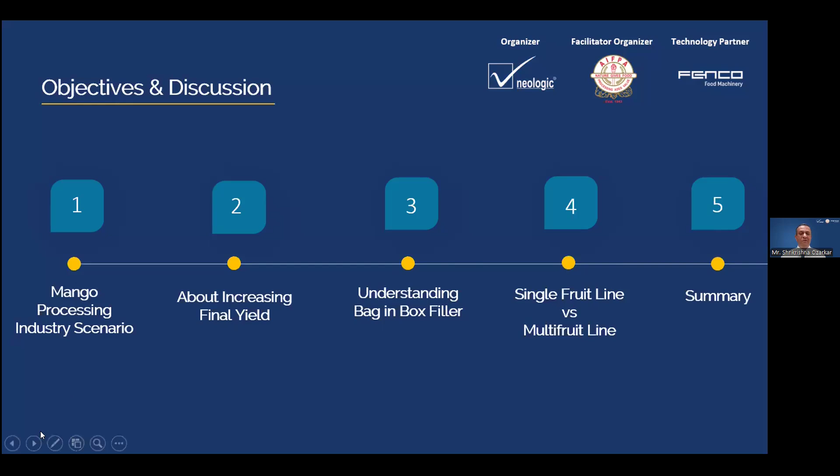So over to you, Dr. Jadli, sir, to take this slide.

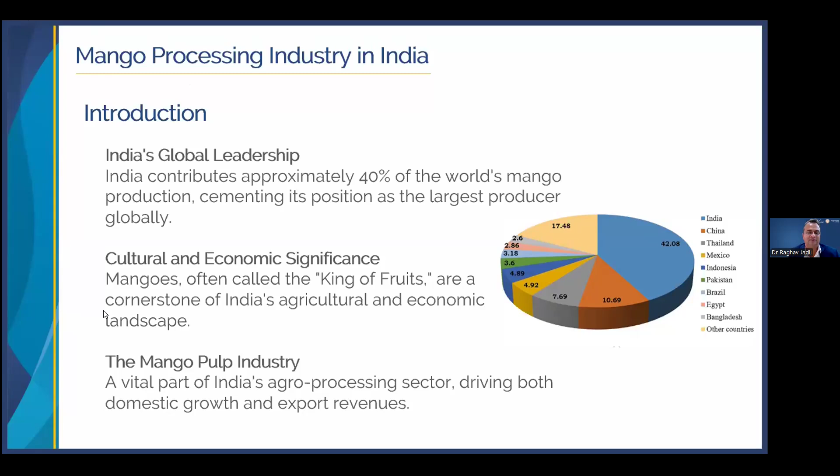Going with this for the mango pulp industry, a large part of the processable variety includes Totapuri, Alphonso, Kesar, and now Neelam, and in some part of Uttar Pradesh in North India, Dashari and Chausa as well.

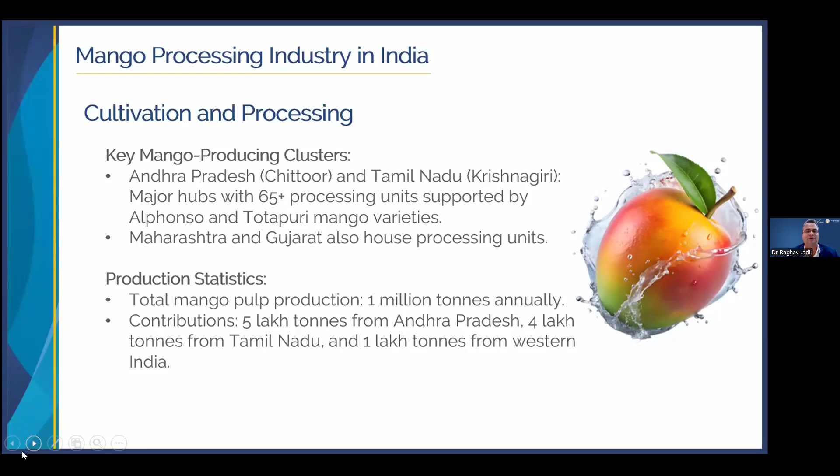When we talk about mango pulp processing, the key cluster area is Andhra Pradesh. When I say Chittoor, I mean it includes other regions like Madanapalle, Vijayawada as well. Then in Tamil Nadu, Krishnagiri, Dharmapuri, and Dindigul and this area. Around 65 plus processing units produce a sizable quantity of mango.

In the domestic market, 40 to 50%, and now over a period of time that percentage has slightly gone up, even to maybe 60%, which is consumed in the domestic market mainly for the juice and beverage sectors. Out of 10 lakh ton produced in mango, nearly 1 lakh goes to the HoReCa and food services market.

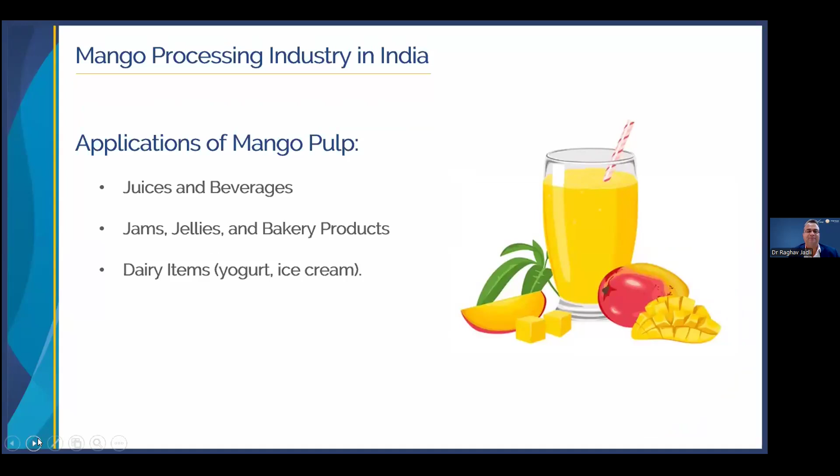Final products, when we talk about it, juice and beverage remain the first one. Then dairy, flavored milk. Then jam, jelly, bakery products, and dairy items like yogurt and ice creams.

There are quite big challenges, friends. The mango industry has been going through a challenging time, particularly on the technical aspect, with wastage and the traditional canning packaging issues like rusting on the seam of the can, and feathering. I think around 12-13 years back, there was a radical shift of the mango pulp industry from canning to aseptic because of these challenges of rusting, feathering, paneling, and buyers always facing issues at custom clearance, even though the inside product was much better, but still the authorities had concerns.

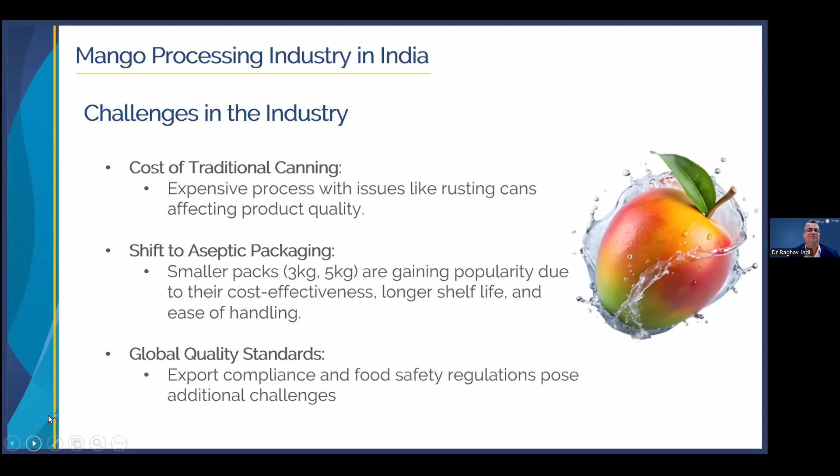So there was a radical shift to aseptic packing. Firstly, we have to meet the global compliances and the new packaging support. What we are really looking for is eco-friendly packaging, and this is happening. This is the trend of the international market, even in India, which has eco-friendly packaging to promote sustainable cultivation practices to ensure long-term growth and product stability. Technology advancement has a big role, and they invest in research for improved processing techniques to maintain quality and reduce cost.

Aseptic is one of these things, and I will take it a little further forward, Mr. Ozarkar - what will be more sustainable in coming times is biodegradable aseptic packaging for better shelf life and export readiness.

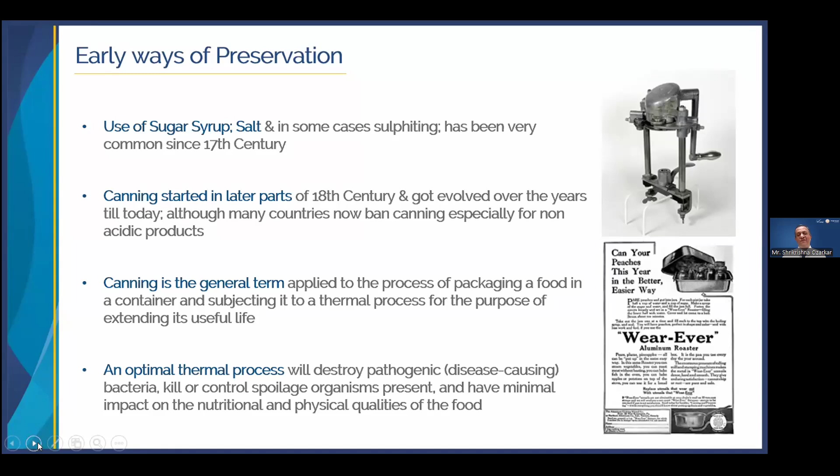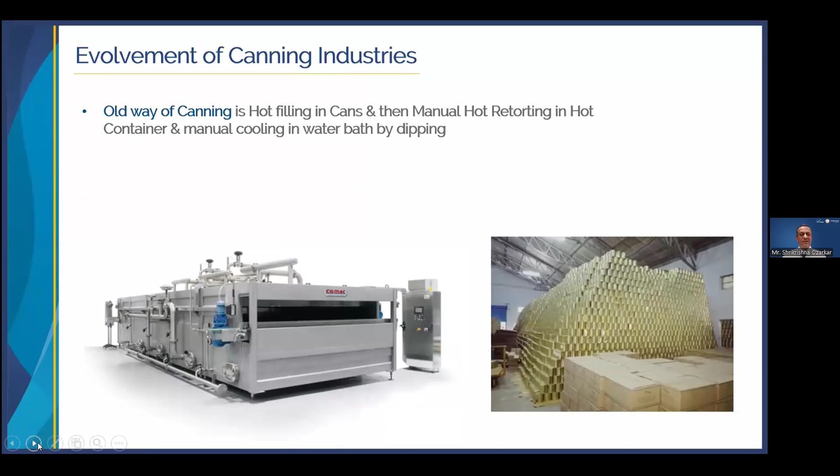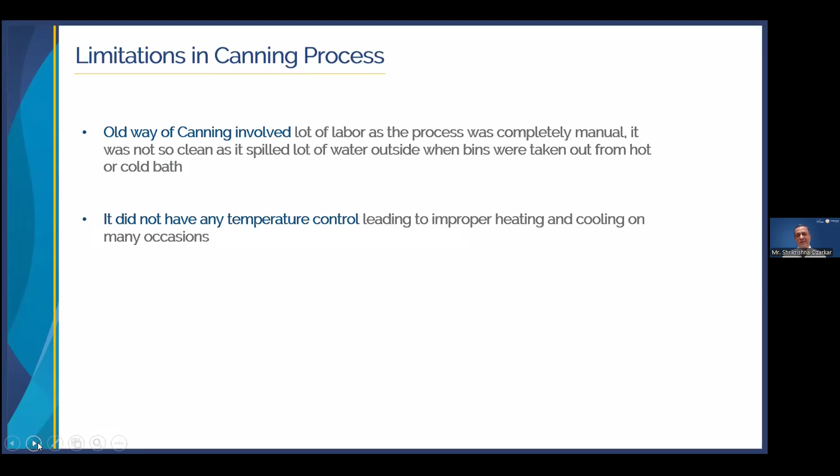I will quickly cover the earlier ways of mango processing. Dr. Jadli has already covered in one of his slides about canning and other industry. This started way back in the 17th century. We won't go into details since most people are aware of what was happening in the canning industry or how mango pulp was processed in earlier times - this is just for reference, refreshing our memories. These pictures we have seen in many places - the canning industry, storage of cans, can cooling tunnels, sterilization tunnels. This has been replaced by aseptic lines due to limitations. Like Dr. Jadli mentioned, the rusting issues - there are places where lead or tin contents are not acceptable. All this has led, along with flexibility, transport, and shelf life benefits, to aseptic lines over the years.

So now we'll be discussing how to add profitability to your processing line, how to increase your yield, and all the technological advancements. For this section, I request Mr. Massimo Manfredi from Fenco Food Machinery, Italy, to take over. Over to you, Massimo.

Thank you, Mr. Ozarkar. Good evening, everyone. Let's try to explain what next could be done, or what best could be done out of your very nice and juicy product to get better yield and better quality. Looking at what was happening in the usual line, we were thinking of finding a new solution to reduce the waste by adding fiber to the same final product instead of rejecting it, as usually happens in the normal pulp refiner.

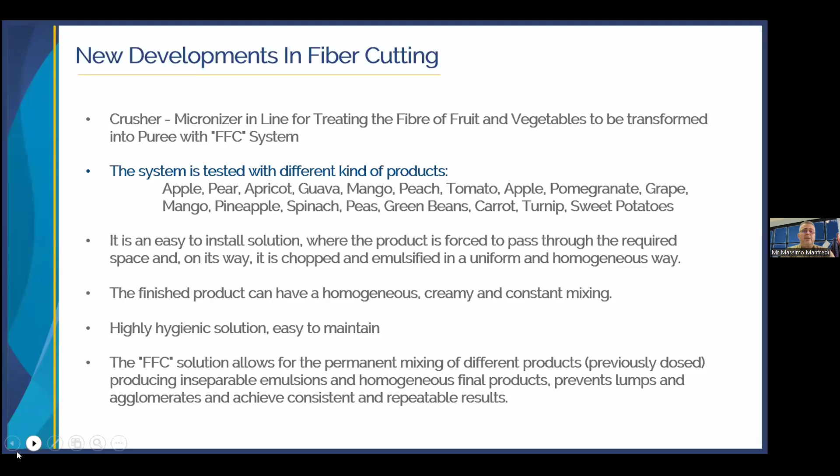So that's why we came with this FFC, Fenco Fiber Cutter. This system has been tested definitely with mango, but all the products you might be reading here, apple, pears, all the continental and tropical fruits, including numbers of vegetables too. Shortly, we could say, as hard as the product will be, the better performance you can have out of the fiber cutter.

Installation is very easy to be done, could be installed in any of the existing plants all over. What we were able to achieve, just to give you a couple of numbers: apple-based product, we were having product with Bostwick between 10 and 12, and we were going down to 4 to 5, always with natural product, no concentration, nothing.

What we were obtaining is a more creamy product, almost without black speck or brown speck. This is facilitating a lot also the decision to have or not the decanter in line, which is always better to have, definitely, but this will facilitate the result. And very important also is that we are not going to have the syneresis.

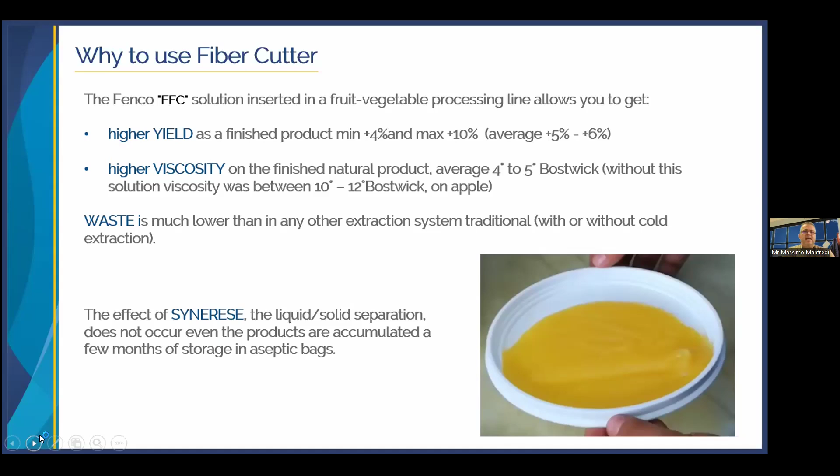Syneresis is the effect of the liquid and solid separation while you have your product packed in an aseptic bag after a couple of months, let's say, a couple of weeks. So all this is generating a very creamy and very effective final product.

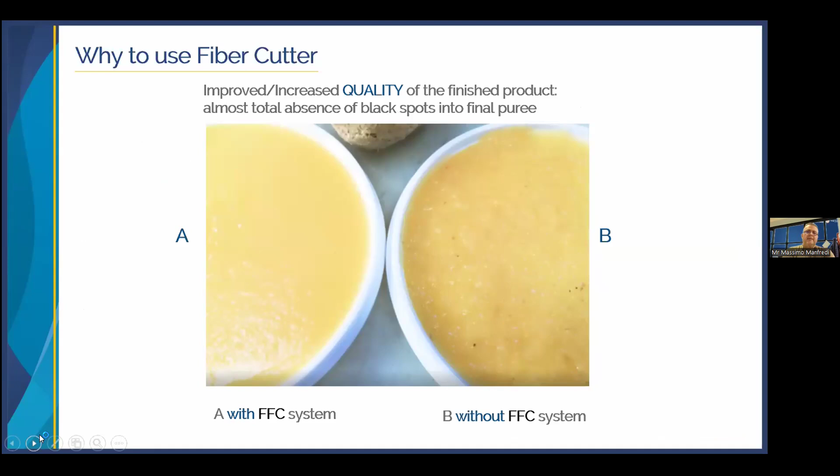And here you could see, on the left side, product treated with fiber cutter; on the right side, product not treated with the fiber cutter. So you could see the differences.

As I was saying, the quantity of waste which you are going to have -- this is where we are measuring our ability -- is always on the waste side. So you could see my hand pulling a ball of fiber rejected after the turbo refiner. It is practically only mostly cellulose, or not edible part, let us say.

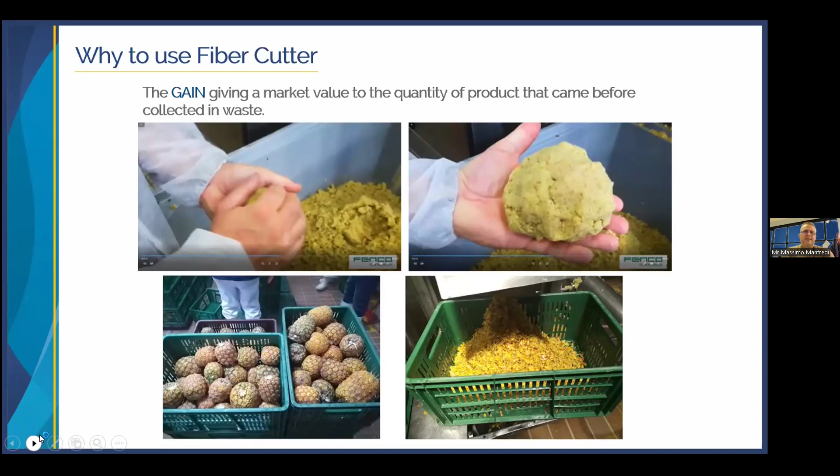Similar result has been achieved with pineapple and most of the fruits. This is improving the quality, reducing the waste, or increasing the yield. Better, with practically almost no black specks and without syneresis. These are the main goals.

The tool could have different configurations, allowing also to crush -- like what we are going to see here is a pepper chopped, respecting the seeds. So there is a possibility to play with the same system by changing the tools inside.

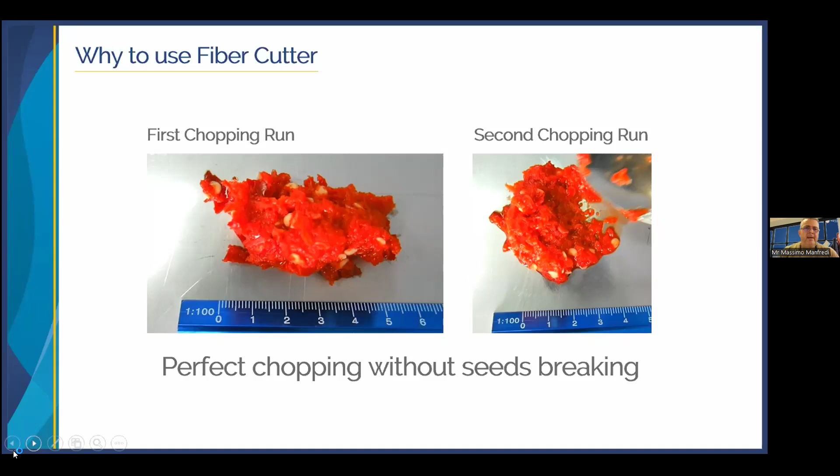So what has been previously done and treated so nicely during the process, now we have to fill it, and to fill it into the aseptic, as my colleague was explaining a few minutes earlier.

And the new tendency is to have the web type filler. So what does that mean? It means that in aseptic condition, in fully automatic mode, we can fill the puree, natural or concentrate or whatever is your final product, into smaller size -- an ideal solution and ideal size for the HoReCa circuit, meaning hotel, restaurant, and catering, and not just the industrial size as you are used to nowadays.

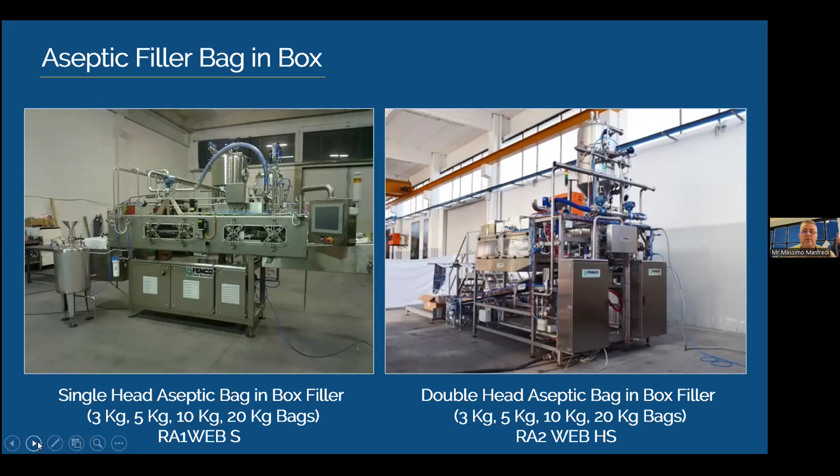So for this, we have different types of solutions. On the left side, you could see the simple aseptic filler, single head, which in any case is able to achieve up to 500, more than 500 bags per hour on various sizes, definitely, and later we could see some diagrams. On the right side, we have the double head high-speed filler, which could go up to 600 bags per hour each head. So single head, left side; double head, right side.

Ideally, the system needs an aseptic tank to control the flow and to guarantee that there's no recycle, because what we have to protect and prevent is the thermal stress -- to avoid having the product overstressed by double thermal treatment due to the recycle.

Any of the aseptic fillers could handle pressure type aseptic spout, or open and reclosable, or V-top. V-top is definitely for the juice, for the very liquid one. So the system and solution are available from 3 kilo up to 20 kilo as a regular size.

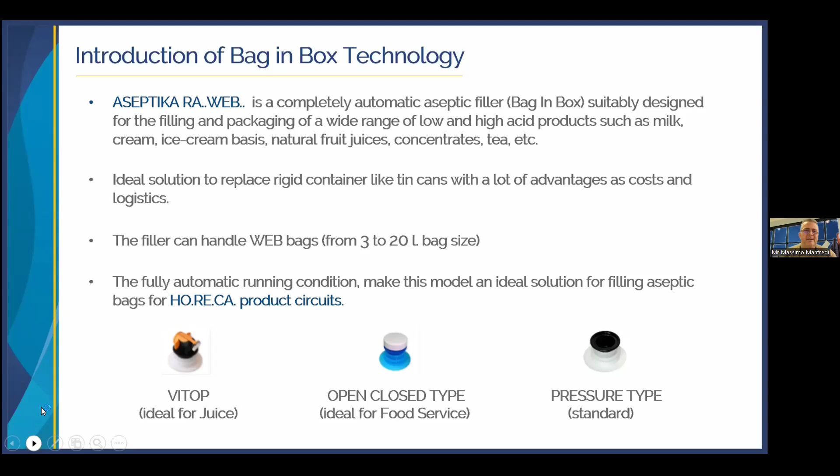Definitely we are filling also the samples, which are 1 kilo or 2 kilo bags -- small quantity -- trying to save also and to protect the production, definitely, and the sales.

So nowadays the solution could be more and more devoted or oriented to these types of smaller bags, and the quality of the bags, as well as the technological solution applied, guarantees the barrier -- meaning the configuration of the aseptic bag could allow up to a year and a half, up to 2 years, of safe storage without compromising the original product and the original condition.

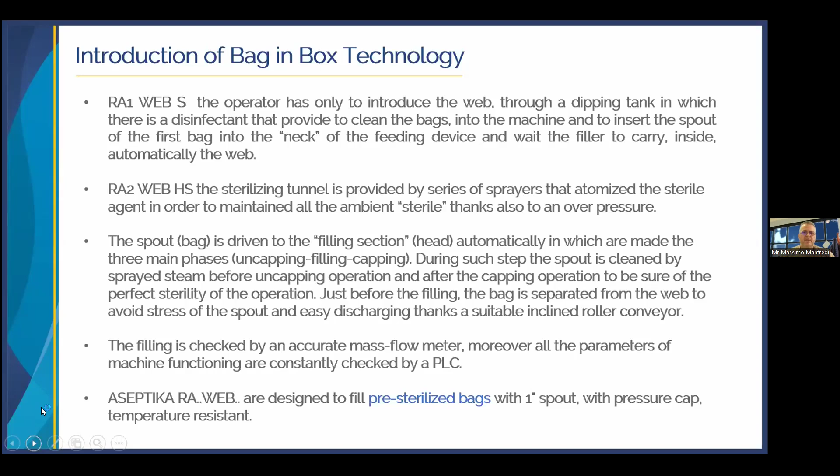So we can see in the next slide some pictures and probably some diagrams about the capacity, I hope, to let you understand the quantity or what is the capacity we can provide you as a filling capacity.

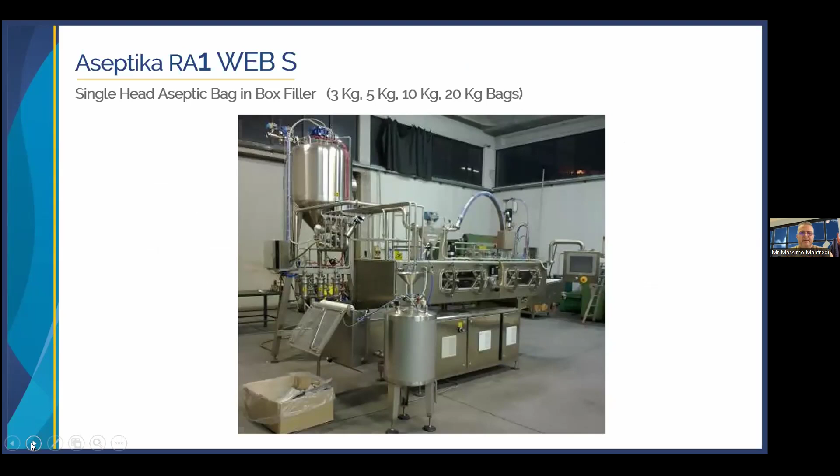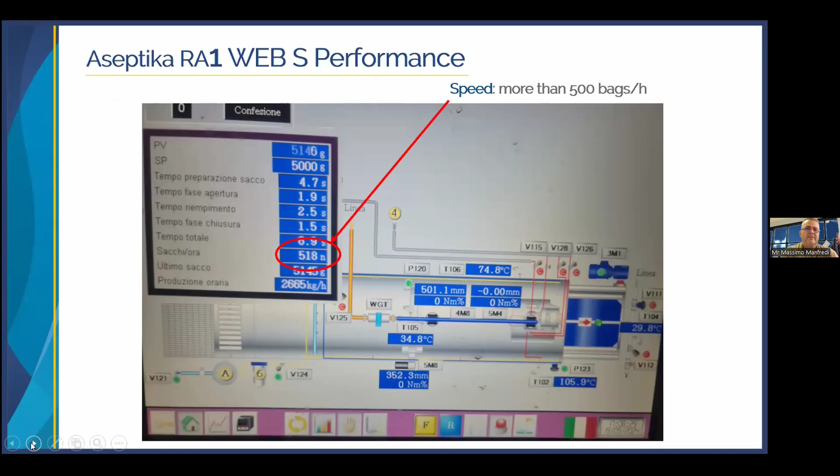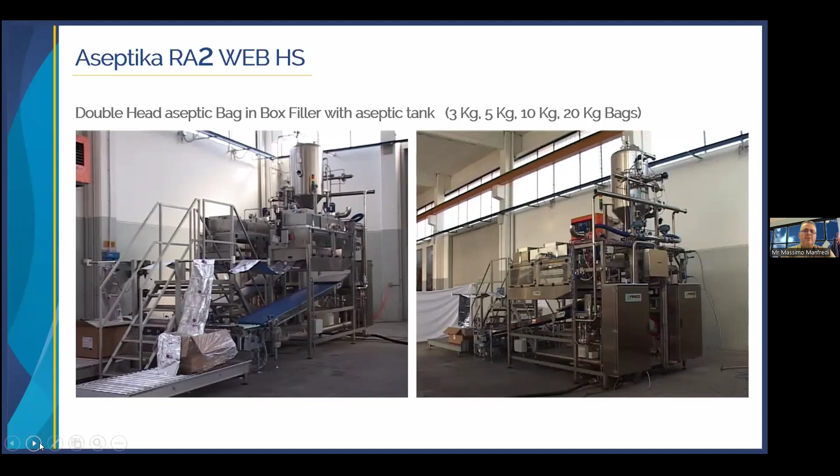This is. Thank you for the attention. If you have any question, I'll be pleased to answer your needs.

Thank you, Massimo, for the insights on the developments, specifically about the filler. Very interesting technology. And I'm sure all of our attendees and participants must be very eager to understand more about that, which we'll take at a later stage.

We are also going to touch base on two different aspects in the development of the technology. As we all are aware, day by day the carbon tax is going to be implemented all over the globe. The pollution, the fuel consumption, everything is now monitored and it is giving us a cost like anything. So the MVR or TVR technology is something we are going to just touch base upon, because that is a different topic altogether, and maybe in the future we'll be having a separate webinar on that particular aspect of the technology.

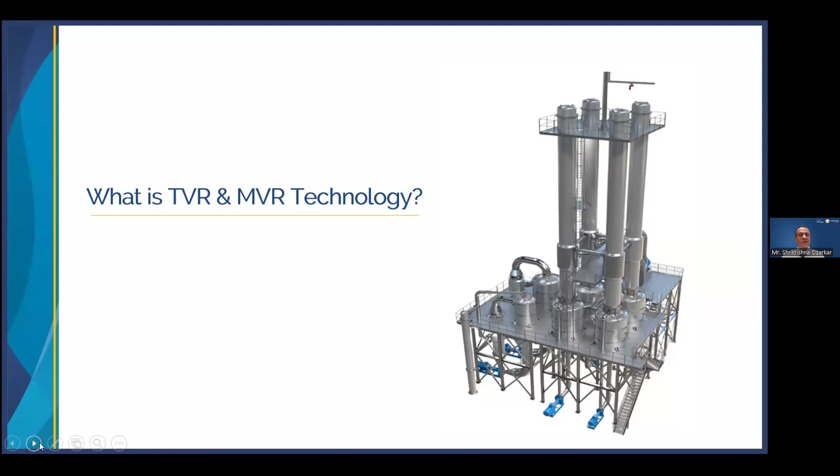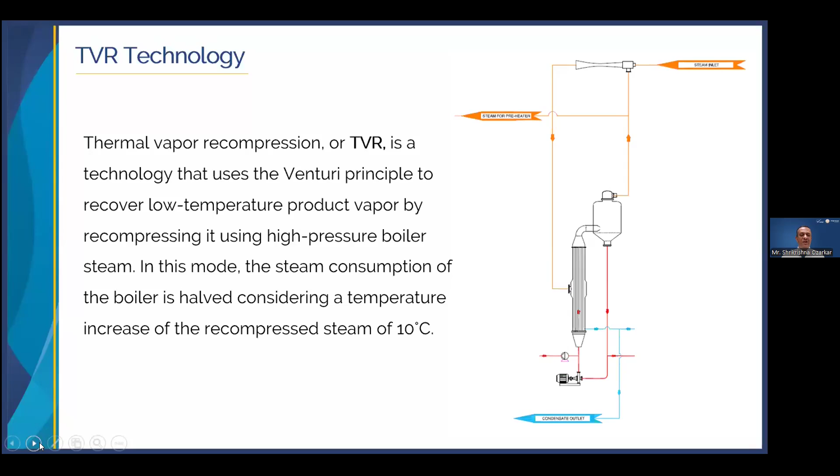So what we are going to do over here is just touch base on these two particular technologies. What is TVR technology and what is MVR technology? Thermal vapor recompression is going to happen in the TVR, and that is going to use the Venturi principle to recover the low temperature product. We will not be going into details of all this, but just to touch base on what's happening in technological advancements in the processing field. This is the area where a lot of people are going for, a lot of people are going for TVR as well as for MVR. So MVR is mechanical vapor recompression and TVR is thermal vapor recompression.

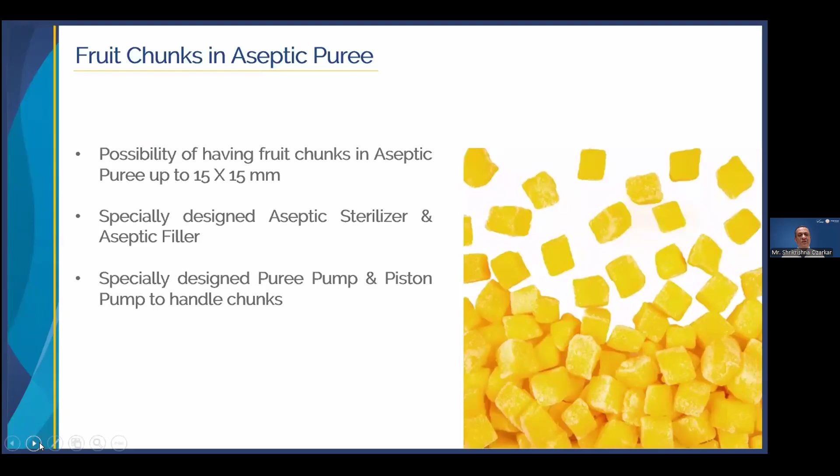Moving ahead, another area of technological advancement where people are looking is the use of chunks. We all know there are juices available now in the market which have small chunks, maybe 3x3 or 5x5. But Fenco has developed a typical aseptic sterilizer as well as filler which can process chunks of definite size. So the sterilizer, aseptic filler, as well as the piston pump which is giving the feed to the sterilizer, is also designed accordingly. We are going to just touch base on this, not going into the details. We will be covering the next topic.

That is, what is the advantage of having multi-fruit processing? I know most people now are having multi-fruit processing, but there are a few industries still running single fruit. So let's try to understand the advantages, or what is going to happen when we convert a single fruit processing industry into a multi-fruit processing industry.

The first and most important aspect is, if I'm running mango, I can be running the plant maybe over a couple of months, that is 60 days, maybe sometimes 70 days, or maximum 90 days. But the rest of the time, if it is single fruit, the plant will be running idle. And we don't want that to happen, because when everybody is investing so much, they should have a faster return on investment and run the plant for the maximum number of days.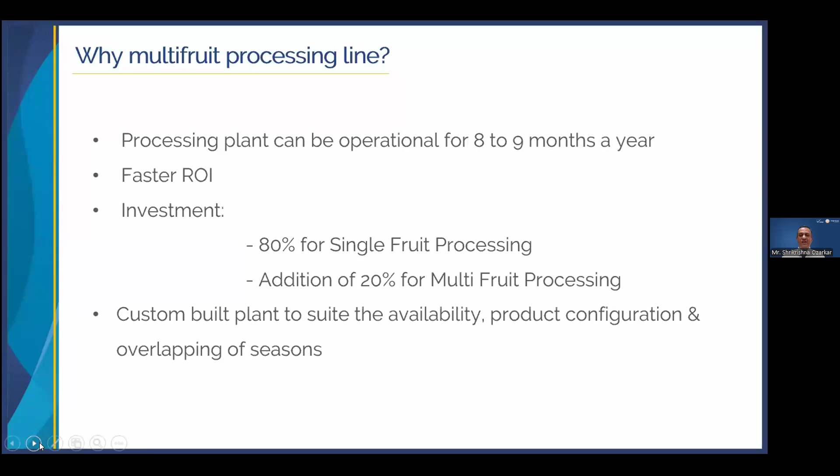So if we convert this particular plant from say a 3-month period to 8 to 9 months, where they can process guava, tomato, papaya on the same plant, then the return on investment is faster and break-even is earlier. The investment to convert from single fruit processing is hardly an additional 15 to 20%, depending on what kind of major fruit you were processing earlier. Of course, all these plants are custom built to suit the availability, product configuration, and overlapping of the seasons. So here you will see, this is my typical process flow diagram of a single fruit processing line.

Receiving, primary fruit washer, secondary fruit washer. If I go to primary fruit washer, this is a typical fruit washer employed in the system. Then secondary fruit washer, if I have to remove the traces of chlorine, then sorting or cutting conveyor. Of course, for tomato there will be a different conveyor, but for mango and other things which we need to cut, there will be a different conveyor.

Then we have a slat elevator to take the fruits ahead. We have a destoner, typical destoner picture over here. Then pulper finisher, buffer tank, preheater. Again a preheater, tube in tube preheater, heated by either PHE or THE for the media side.

Then we have a decanter, what Massimo was mentioning in between. And when we add this fiber cutter, the usage or the load on the decanter is definitely going to get reduced. Then we have standardization tanks, aseptic sterilizer. Here is the aseptic sterilizer. Then we have aseptic filler. And then we have ambient storage.

So this is the entire single fruit processing line. But when I convert this into a multi-fruit processing line, I add only a few machines, like I'm showing over here.

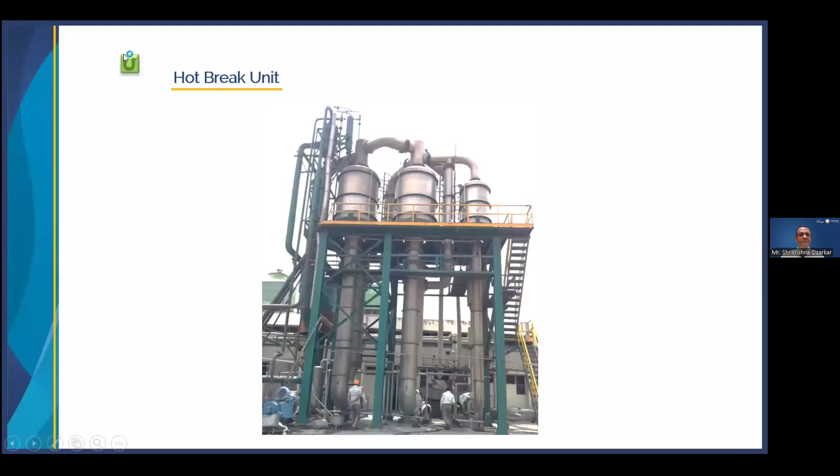So I add a hammer chopper for cold break of tomato or maybe for guava. Then I add a hot break system, typically for tomato. Here you can see a typical hot break unit installed in Punjab. And then I add a turbo refiner, because for peel and seeds of tomato, turbo refiner is more suitable. So here is the turbo refiner, twin stage.

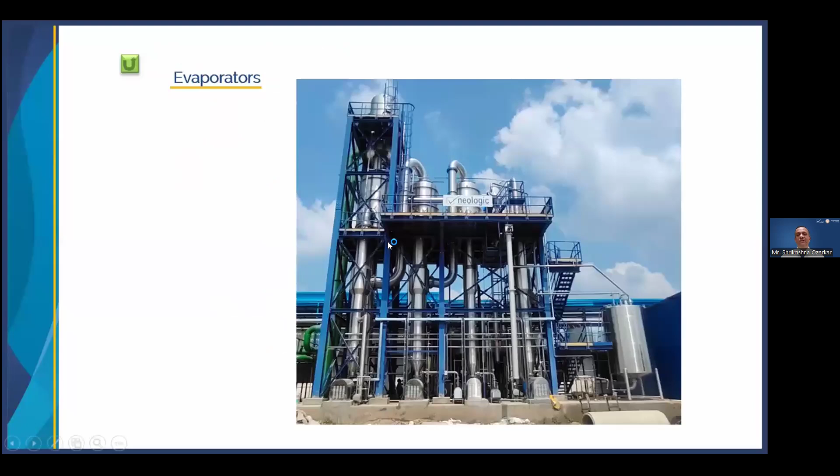Then we have the evaporator. Mango can run for single strength, but typically for tomato we need to have an evaporator. And here you have a typical triple effect evaporator along with the hot break system, recently installed in Bihar. So this is how a single line can be converted into a multi-fruit processing line.

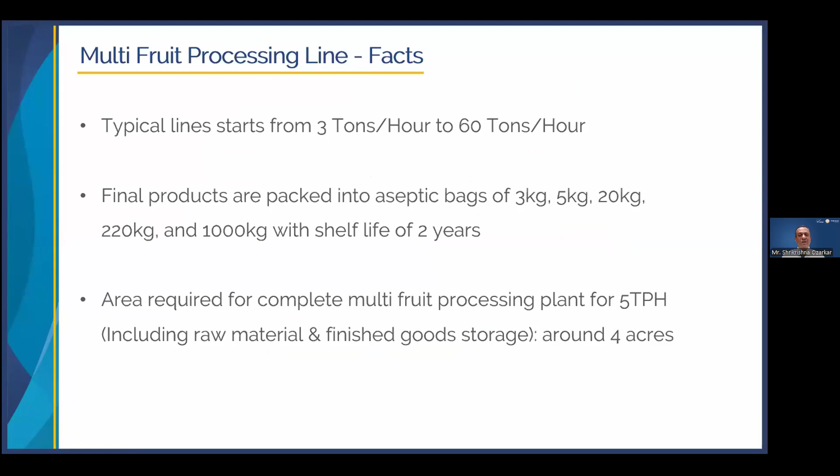Let's try to understand some facts of these lines. Typically these lines can be from 3 tons to 60 tons. The biggest line Fenco has installed is 60 tons per hour, in China. The final products can be packed into 3 kg, 5 kg, 20 kg, 220 kg. Of course, the filler here can be a regular aseptic filler, single head, double head, monoblock, or maybe a wet filler, which Massimo was explaining some time back. The area required will depend on the kind of fruits you are processing.

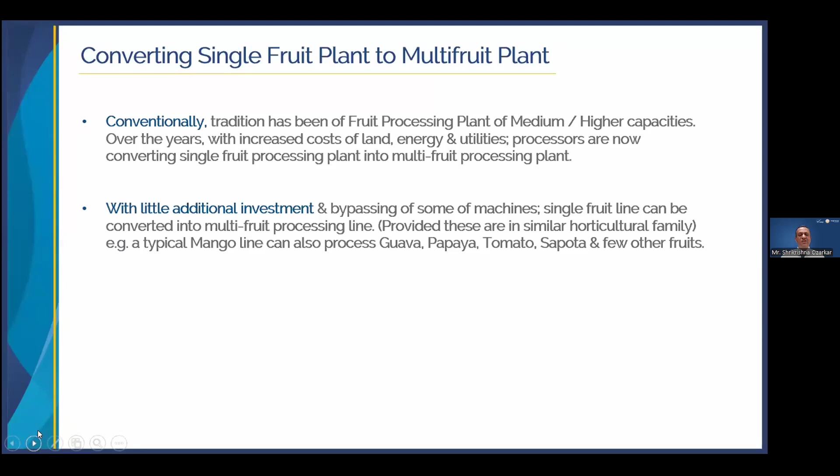So converting single fruit into multi-fruit: conventionally, the traditional single-fruit line has had increased cost of land, energy and utilities. So if I convert it into multi-fruit, my break-even point is going to be faster. The investment is going to be very little, say 15 to 20%, depending on what is the primary fruit you are processing.

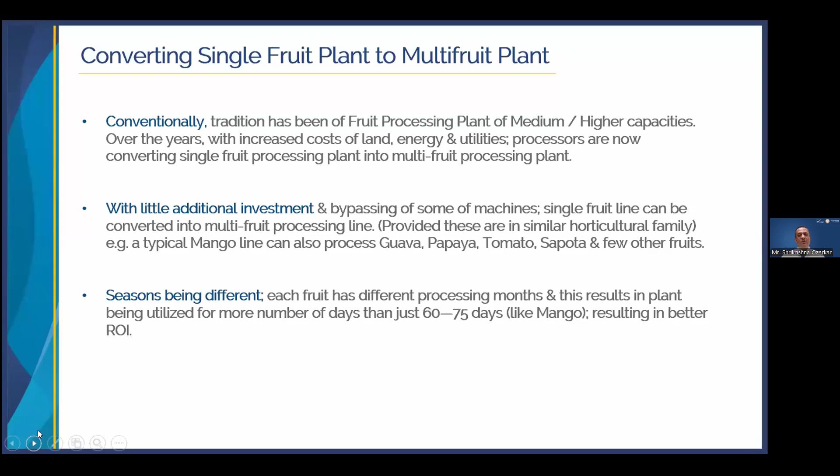Then seasons are different. Maybe some of the seasons are overlapping, but most of the time seasons are different. So when the mango season is over, we will be having another season for say guava, papaya, tomato. So these seasons I can cover throughout the year. Instead of running the plant for say 2 months, 3 months, 70 days, 60 days, 90 days, I can run the plant for 200 days, 250 days, depending on what kind of products I'm going to process.

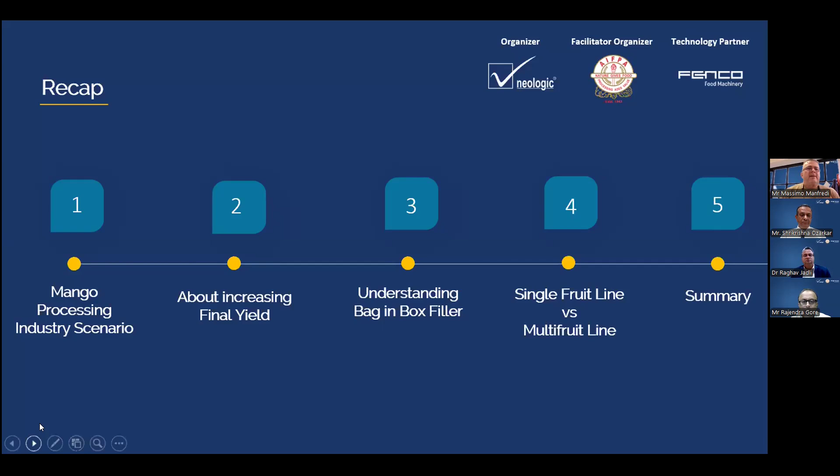What happens inside is that we have a sort of blades where we respect a minimum distance of 0.5 millimeter for the pulp going through. So whatever goes through will be micronized, making the further operation of the pulp refiner much easier, which is usually used at 0.5, 0.6 millimeter or bigger, sometimes smaller, but hardly smaller than that. This facilitates a lot, since fiber previously of a bigger size goes through the holes of the screen.

0.5, 1 millimeter, 2 millimeter - these are the three main options we can have. So as Dr. Jadli was saying before, many people don't know exactly what that means - smoothie, creamy, juicy, puree, etc. This is facilitated also to achieve a more homemade style finished product, or a more creamy product.

Definitely the performance will be different. We cannot expect to have the result of 0.5 millimeter from 2 millimeter - that is not possible. But a certain improvement is also possible.